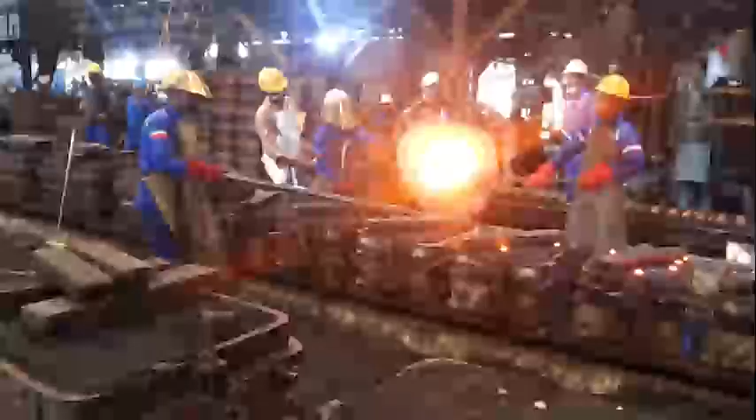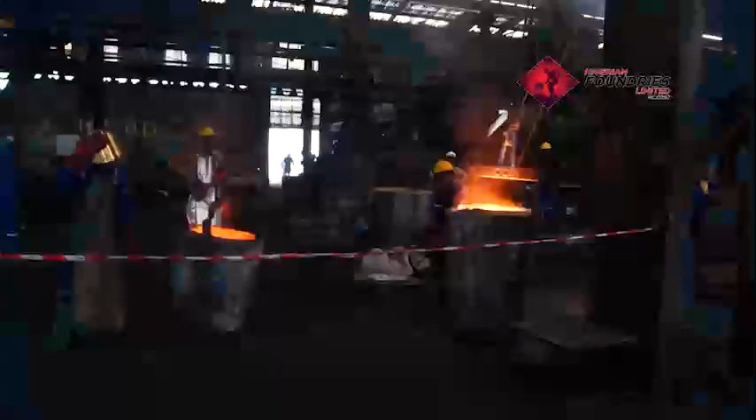There is no mentioning the growth and development of foundries in Nigeria without the name Papadopoulos, the industrious Greek brothers who came to Nigeria in the 50s to drive ease and possibility in Nigerian manufacturing, with the conviction that any country that desires growth needs foundries to support its manufacturing activities. A small grey iron foundry, the Nigerian Foundries Limited, was founded in 1969 by two brothers, Romeo and John Papadopoulos, at Ilupeju, Lagos. After the founding Papadopoulos brothers passed on, over 4 decades later, their sons, Vasily and Nicholas, took over. Vasily Oye Papadopoulos is the managing director of Nigerian Foundries Limited.

Born and raised in Lagos in 1962, Vasily is well-read, vast beyond his operating field, and has acquired advanced general management knowledge across different disciplines. He holds a bachelor's degree in economics and history from Rollins College, Florida, and a master in management degree in international management from Thunderbird School of Global Management at Arizona State University, both in the United States. He is a strong believer and driver of local content as the chairman of the Manufacturers Association of Nigeria Local Content Group. He believes manufacturing can still play a much bigger role in boosting Nigeria's slow-paced economy if and when friendlier policies are implemented to drive the possibility.

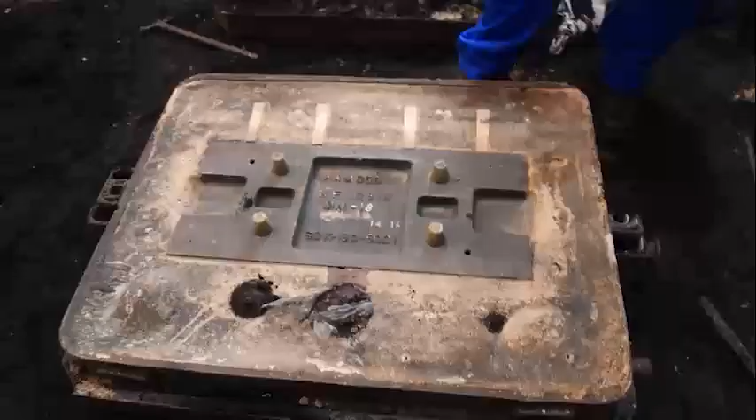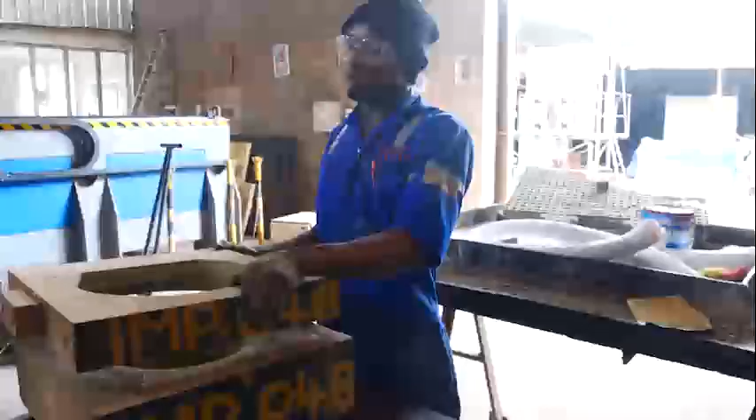Nigerian Foundries Limited has since expanded its operations beyond cast iron, municipal castings, and water pipeline fittings into providing innovative solutions through its fabrication yard and additive manufacturing facilities, among others, across a diverse range of clients within and outside Nigeria, such as clay brick and glass manufacturing, oil and gas, military defense, construction, agro-allied, food processing, to name a few, and it keeps growing.

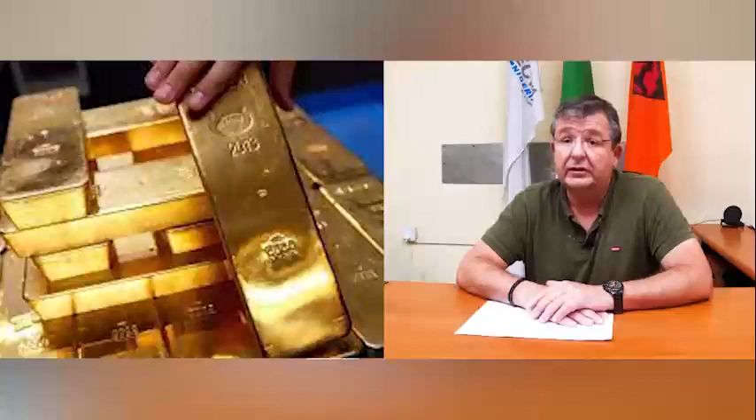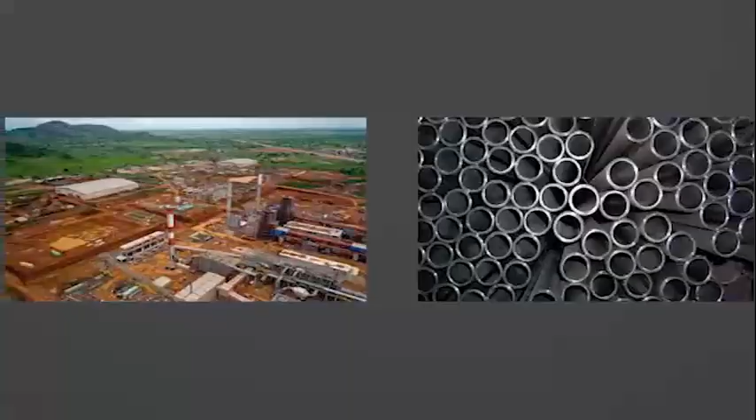Today we can talk that we do have the first Segilola gold mine in Ilesha, the first indigenous official gold mine in Nigeria. We can talk also of African Industries, which has invested considerable money in an iron ore mine on the border of Abuja to Kaduna, where they're actually mining iron ore and using beneficiation methods to make sponge iron to use in their steel mills, very laudable.

We can talk also about mines like Royal Salt in Abakaliki, who've existed probably within the last decade, that are mining zinc and lead. And then we can also talk about a few companies that have sprung up. One of the older ones is Royal Ceramics, that uses indigenous clay to make ceramic products. And I just heard there's another one that just opened up in Ogun State, a huge one. I have not been there, on the way to Ibese Dangote cement plant.

Therefore, I can see that the beginning has started. Results have started coming out of the work that has been done the last decade, or the changes in our mining attitude. So therefore, I can say that we're at the beginning. I don't want to refer to mining done during the colonial era, because that's the past tense.

Well, I don't know where these figures have come from, but definitely oil, hydrocarbons displaced a lot of the solid mineral mining that existed in Nigeria from the colonial times. I would say there have been a lot of unofficial mines, or artisanal mines as they are called today, and there are many of them. There has been a lot of artisanal mining, and the end product gets sent to China. Chinese have been here speculating and buying the products.

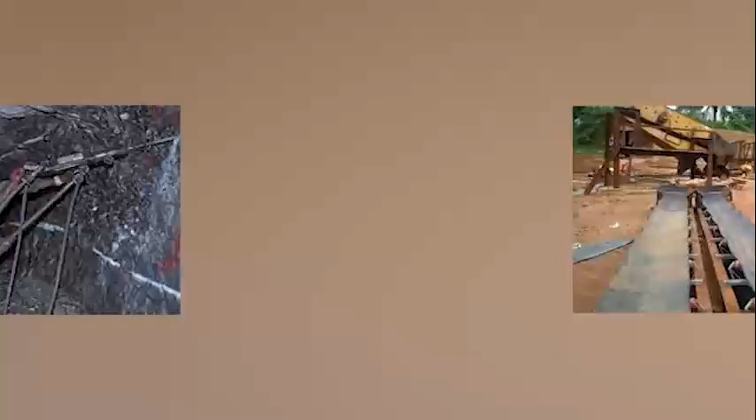So I can't say much more, because in the 80s, I don't remember that many mines, unless we're referring to some of the old mines, like the Onyeama mine in Enugu State, and some of those old government mines which were in the throes of closing down. So I would again want to reiterate that it is only in the last decade that we can say Nigeria has entered the solid mineral game in Africa.

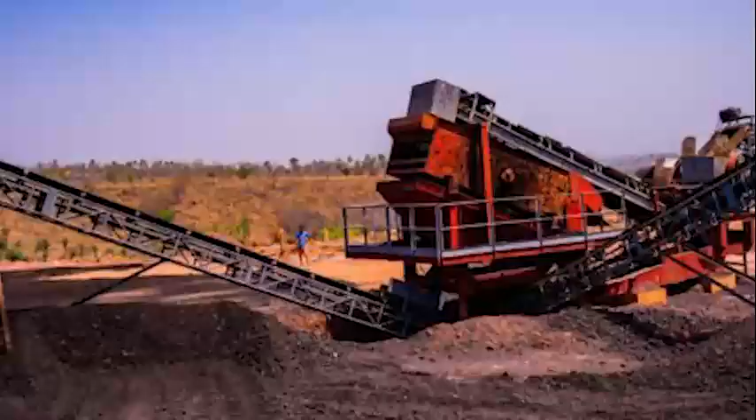Well, illegal mining, which is referred to as artisanal mining, has existed and still exists all over Africa. The Ghanaians are also still battling illegal mining and so on. So the concept is to actually make it favorable and bring them into the fold and make them legal, and not hunt them down to try and force them. That has played a big role again. There's a lot for us to learn from the other African countries, where solid minerals is their forte, as opposed to us. But I think that's the best approach.

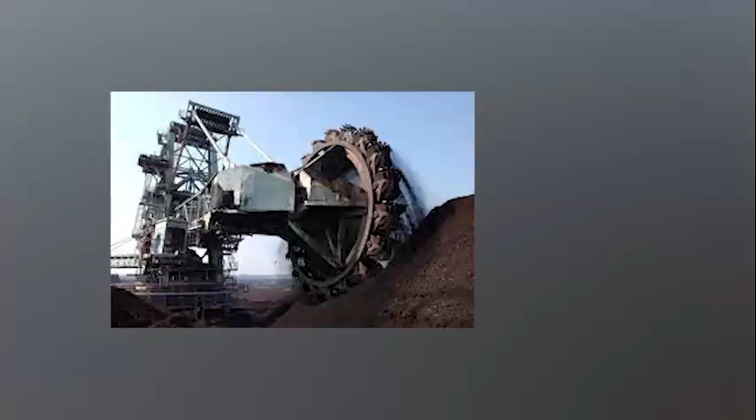Now, of course, there is an issue, because once you start becoming a legal mine, you have to conform to certain statutory factors, and you need to have HSE, health and safety and environment protection. You need to concern yourself about the environment and so on. And most of the illegal mines, or all of them, don't have these costs because they're not concerned. They're illegal. So as a result, they're able to extract minerals much cheaper at the cost to the environment and to the people, and then export it.

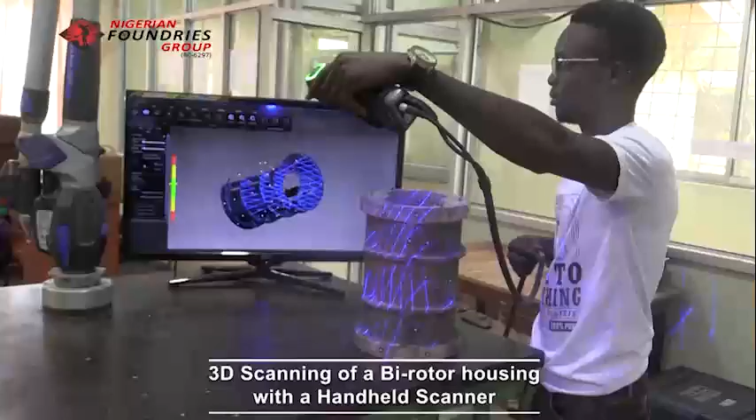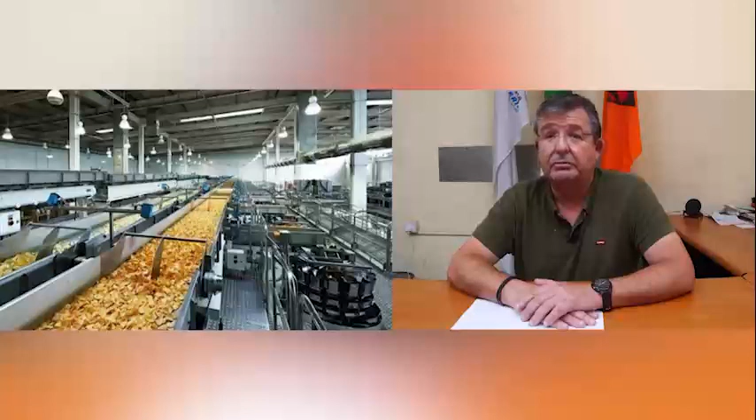We basically have transitioned from being foundries to being reverse engineers. And basically what we do is we keep African industries moving by making tailor-made parts and offering innovative solutions so that industries will not close down. And that's where our forte is today. So mining is one of the areas. Oil and gas is one of the areas. We've even moved into making parts for agro-processing, for food processing plants, and you name it.

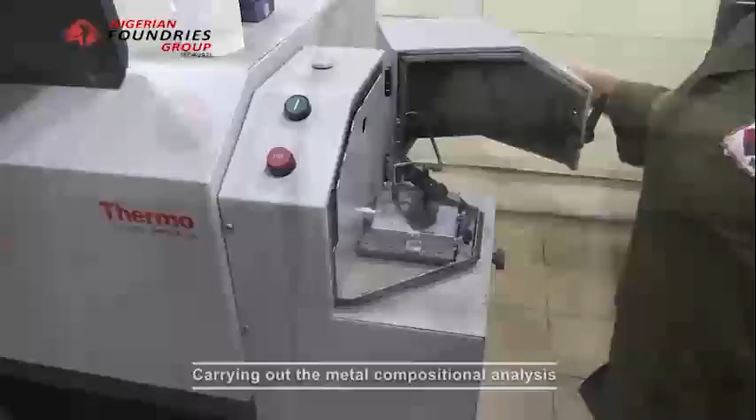What we do is we've invested in additional technologies to be able to produce more and more tailor-made parts. And in particular today, where there is a huge problem of foreign exchange, and we have the disruption of logistics internationally due to COVID and due to the Russian-Ukrainian war, we are seeing more and more companies actually coming to us with their problems to find a solution.

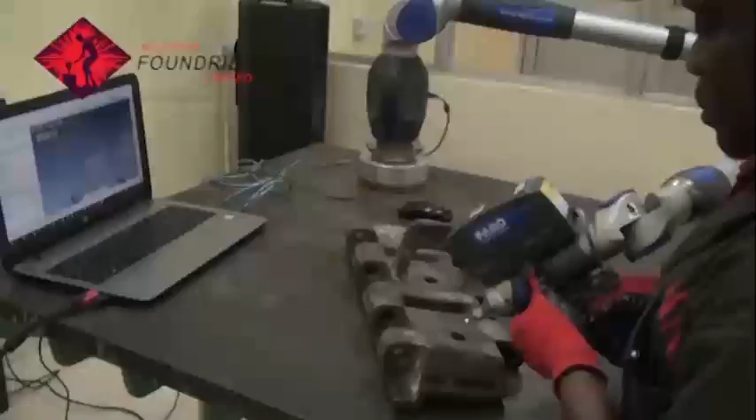So we have employed the latest technologies, which include 3D laser scanning, where we actually scan the parts, develop drawings, and then decide on how we are going to manufacture the parts and give the client the best possibility. Over the years, if you take into consideration that all over the world we just basically have 5 broad manufacturing technologies, we have here 4 of them.

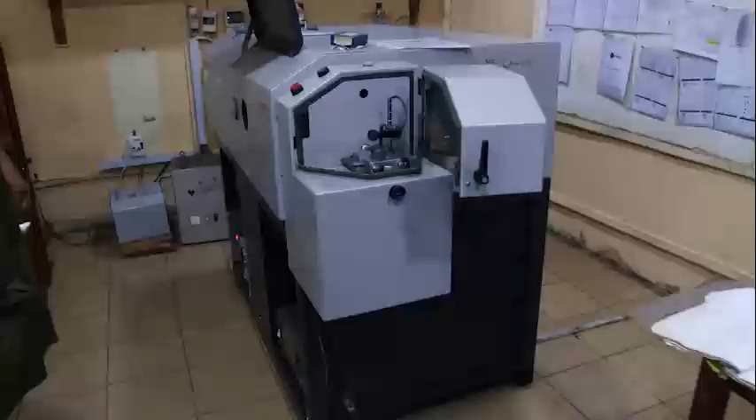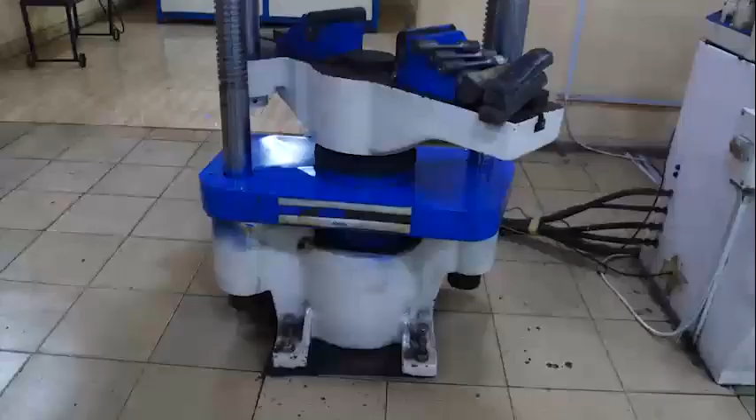We have the foundries, which is both ferrous and non-ferrous. We have 3D printing. We have machining, which is subtractive. We have fabrication. The only thing we don't have is forming, or what we would call in steel, forging. So therefore, a lot of parts can be manufactured using one of the 4 technologies that we possess. Of course, we can't make everything.

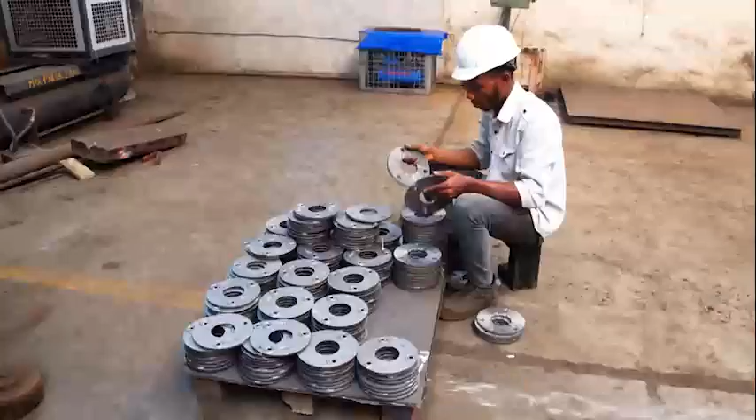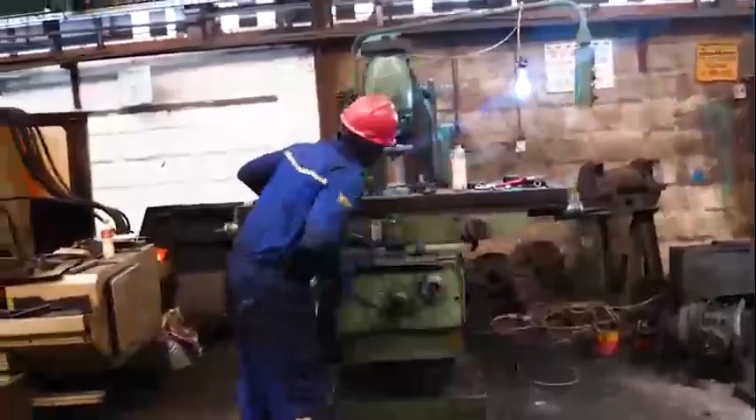Well, either you're asking me the figure to improve or to reach the level that we said we wanted to reach. I don't think we will reach there. We have elections right now, and a new government to come in will take about another 1 year. So there's a lot of hurdles. Only once things stabilize will businesses abroad come and sit and say, yes, let us look at Nigeria to invest in.

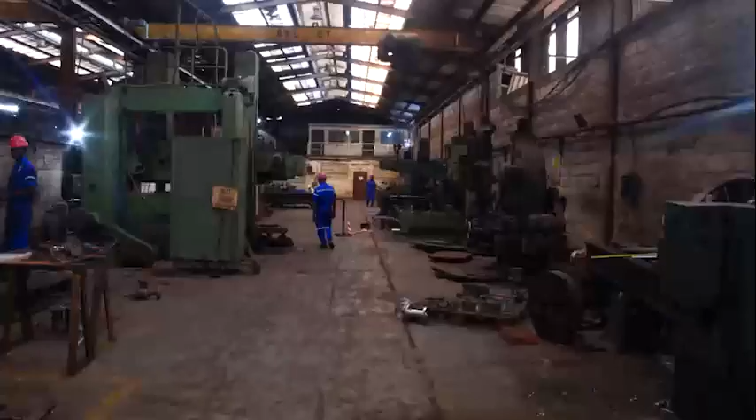I wish to state also one other aspect about us in Africa, is that mining is one aspect. Mineral processing is a broad area which we need to investigate. Making cement is mineral processing. Making tiles is mineral processing. We do not want our mineral resources to be exported in raw form and come back in end products. So there's a huge area over there where companies can invest.

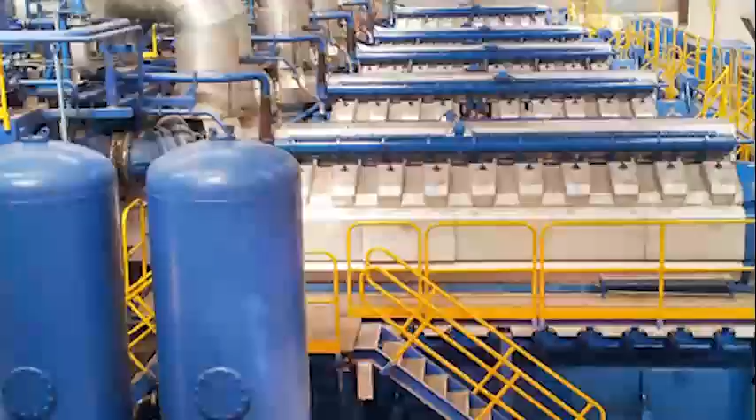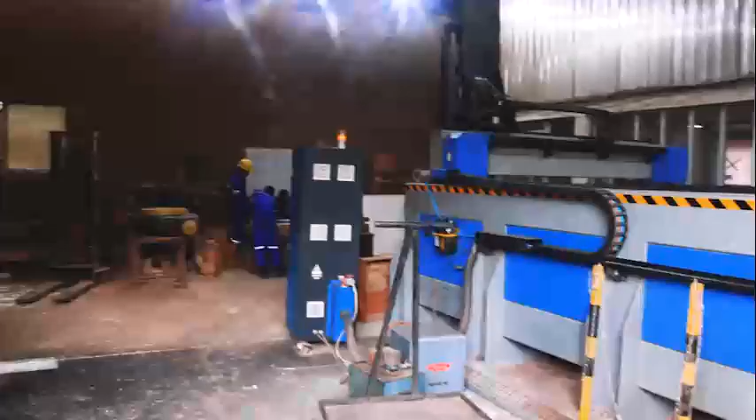A good example is African Industries taking iron ore, making it into sponge iron, using it in their own steel mills to make steel rods and iron building materials. That is a perfect business model. We use CNC machine and 3D printer to make patterns. This section is clearly for manual making of patterns.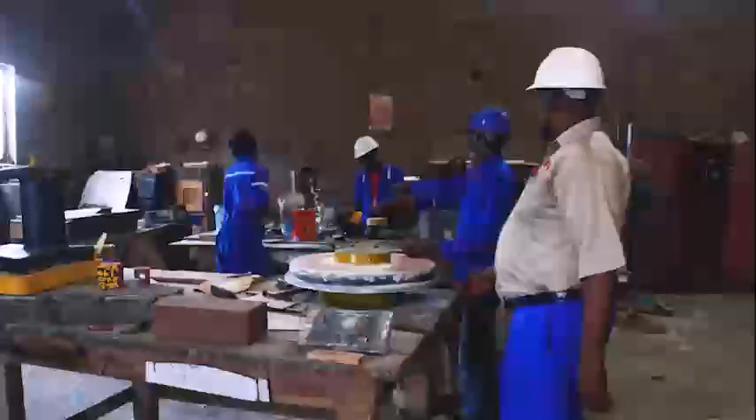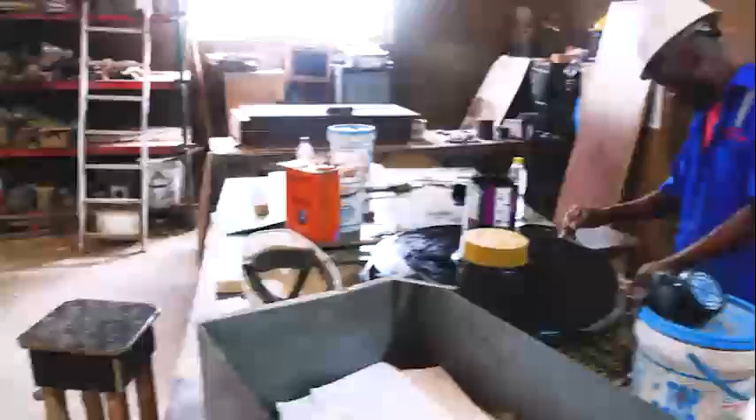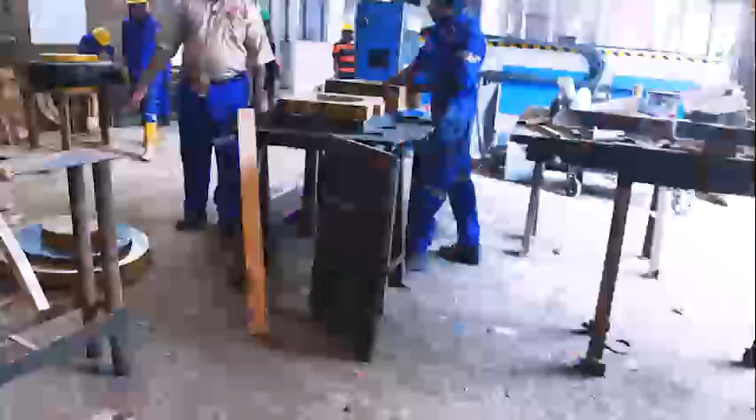This is the front plate for the slurry pump impeller housing, being prepared for molding tomorrow for the gold mine at Osun State. So this is the drawing that they are following to be able to produce accurately. It's part of the pattern of the impeller. This is the core box for the impeller, being prepared for molding tomorrow.

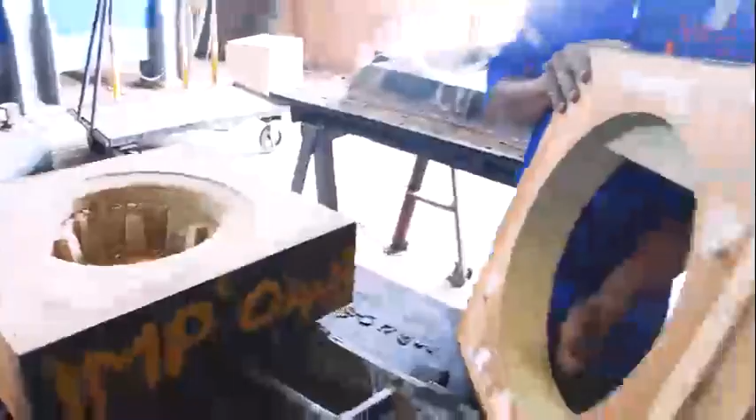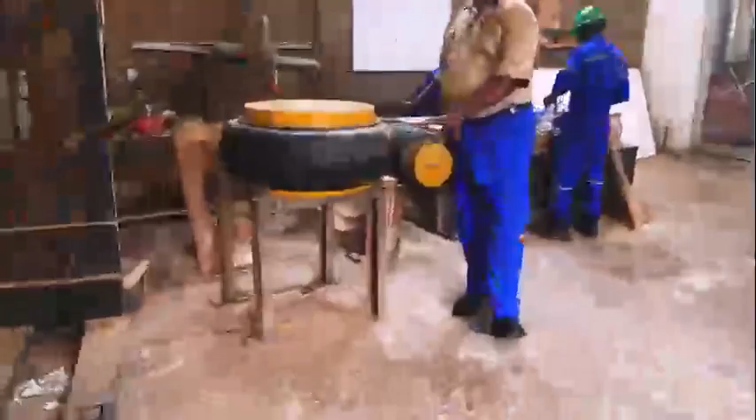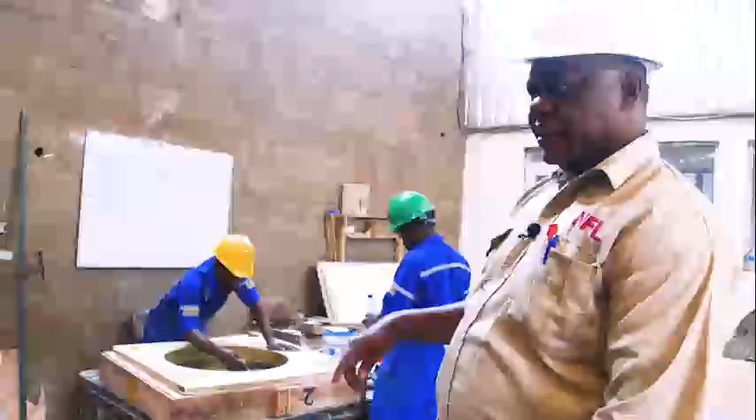This is the impeller housing for the slurry pump. When the gold has been mixed with water, with sand, with all these things, it is pumped out so that it can dry and then the gold can be smelted out. This is part of the core box. They've all been prepared. After supplying the first set, the customer is happy. That's why he's ordering another 3 sets.

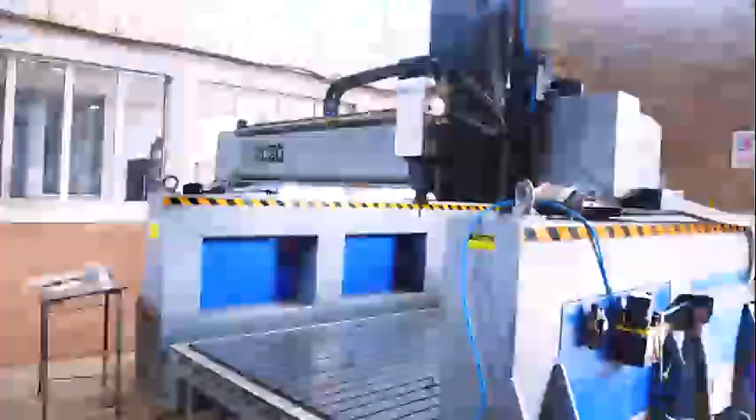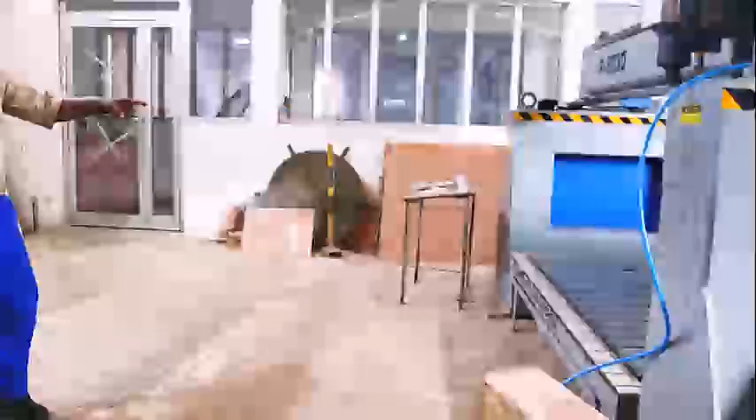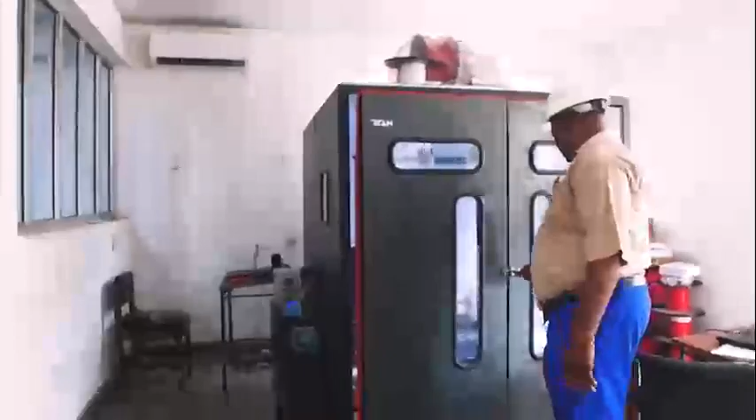This CNC router can do exactly what we are using our hands to do now. This pattern was produced here. I mentioned that we have 3 types of machines here. We have the manual one, where we use the circular saw and planer to make patterns. Then we have the complete CNC router that can make patterns without any human interference. Then we have the 3D printer. This also can make patterns and core boxes. At the moment, it's printing out the core box.

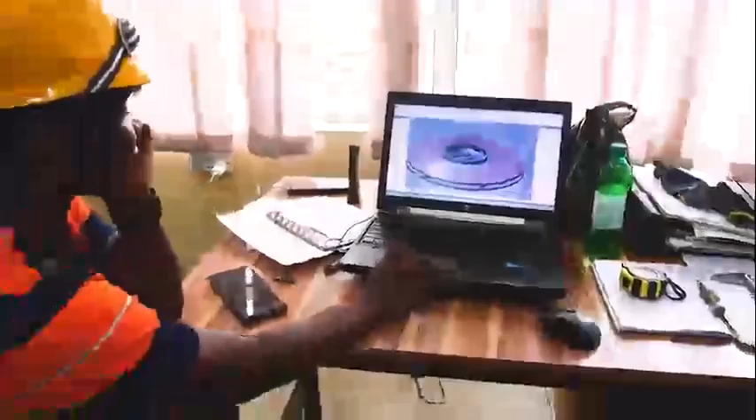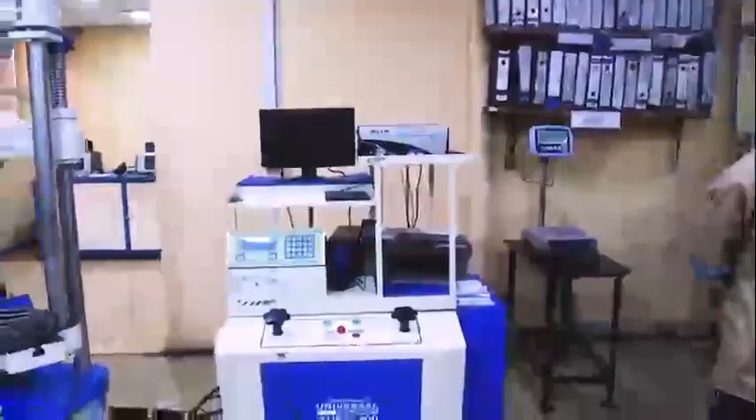This is a typical scanning process. Starting from the silica sand, steel scrap, ferroalloys, whatever other input that we use in making the castings. We have optic spectrometers, both for ferrous and non-ferrous.

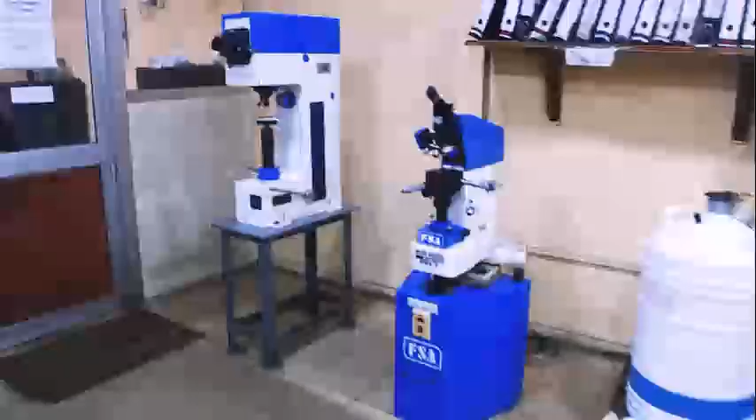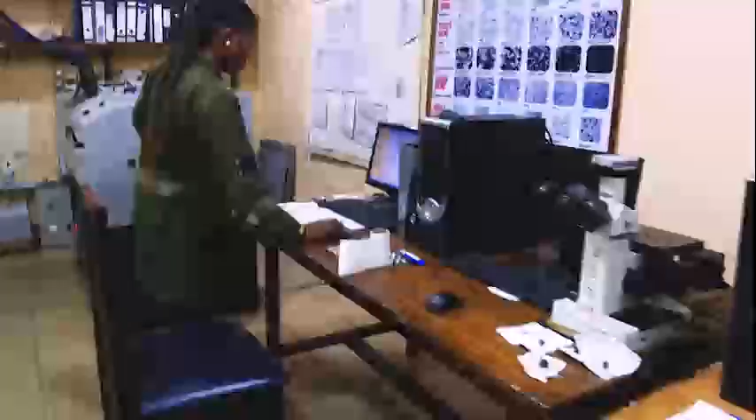We have also metallurgical microscope for checking the microstructures of whatever we have done to be sure that they meet up with the mechanical properties of what the customer demands. These are micro hardness testers for checking the weldment or wires that we have. This is where we check the microstructures, whatever we have produced.

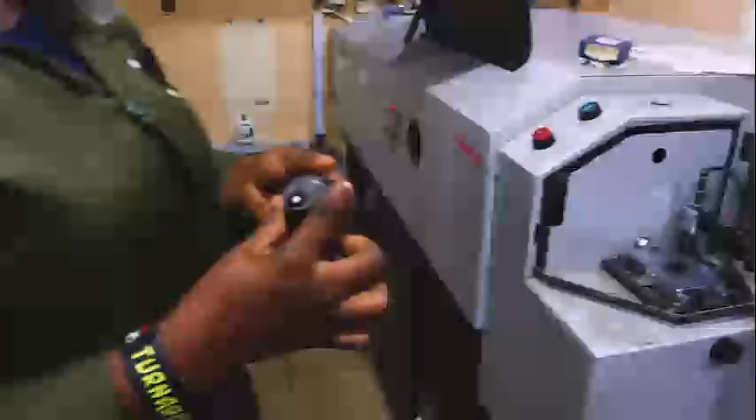We mount sample. This is a typical sample from the melting section. We grind it, mount it on the machine, we'll spark and it will display whatever is the chemical composition of the melt. If it's not correct, we call the furnace operators, they will correct it then before we pour.

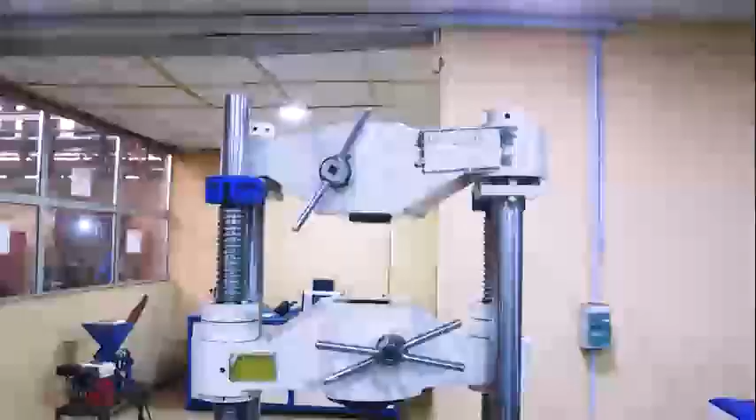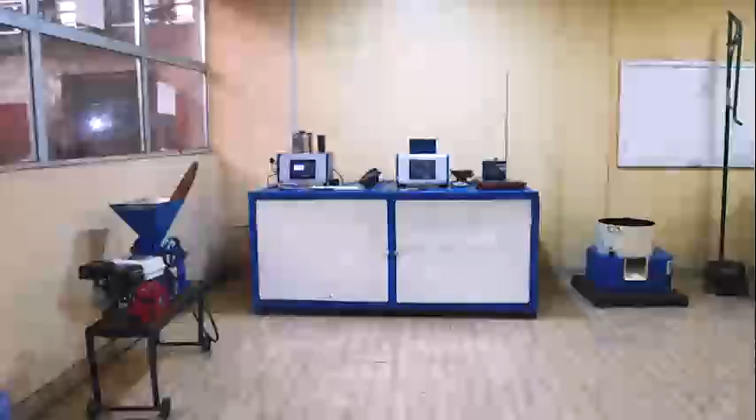Tensile strength, to know whether the strength is what the customer demands, is computerized, so you cannot manipulate the result. This is for sand testing, all the silica sand that comes in, the binders, they're all tested here.

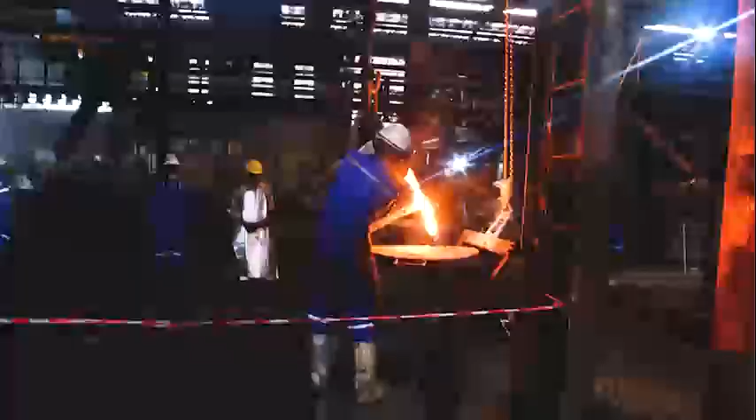This is how the process starts. Inside that ladle, we have some kilograms of ferrosilicon magnesium. You see the reaction. Once they finish pouring, start seeing the reaction, how the metal is reacting with the ferrosilicon magnesium.

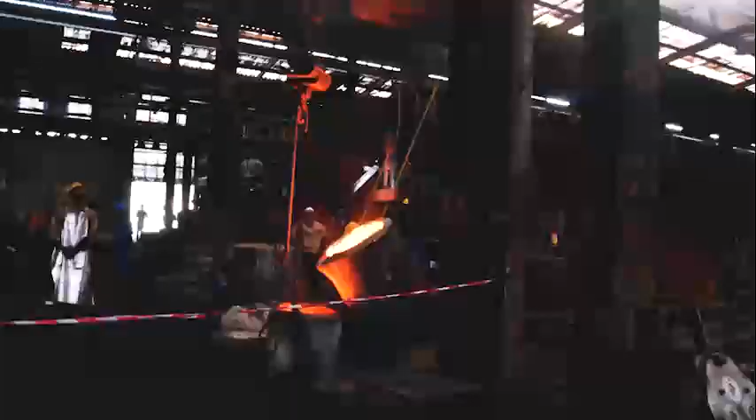Process continue. After the reaction, the metal is transferred from the treatment ladle into the regular ladle so that it can be poured into the mold. Further treatment continue. What we're adding now is called inoculant.

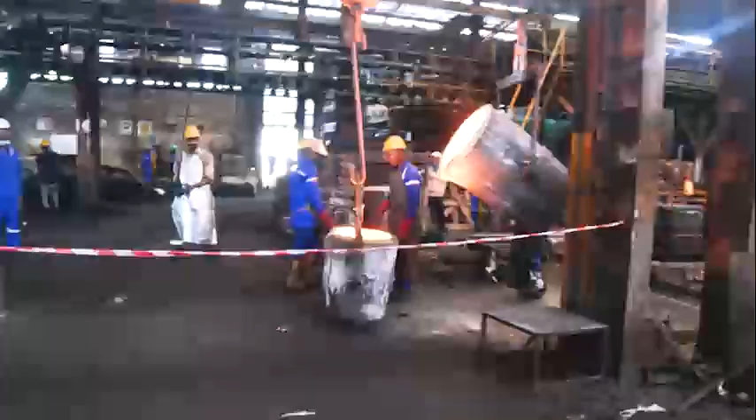Alarm has been set. They must finish pouring this metal within 7 minutes. After 7 minutes, whatever metal remains is poured out as pig.

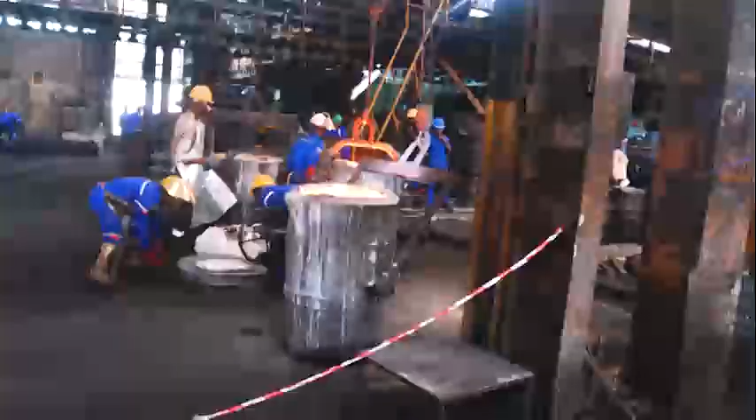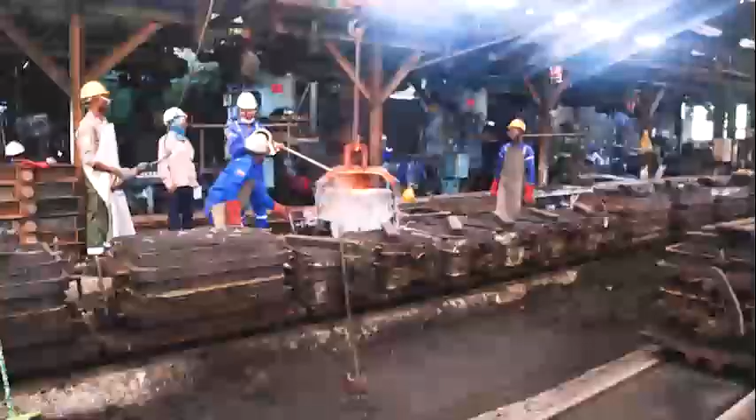Temperature is being checked to make sure that the metal is not too hot, which may result in defect in the casting. Mold treatment is being done on the metal. That metal flowing at a temperature 1,360 degrees.

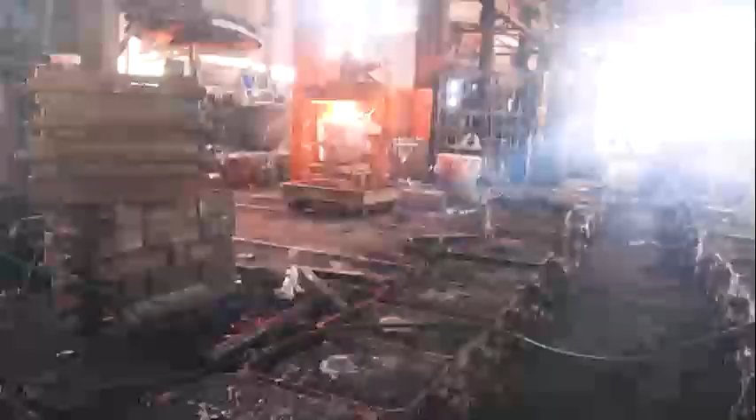What is happening there, we are preheating the ladle. You have to preheat the ladle to 700 degrees before you now receive the liquid metal to avoid explosion when the metal is being poured into the ladle. When the metal is coming at 1400 degrees, the ladle is heated up at least to 700 degrees.

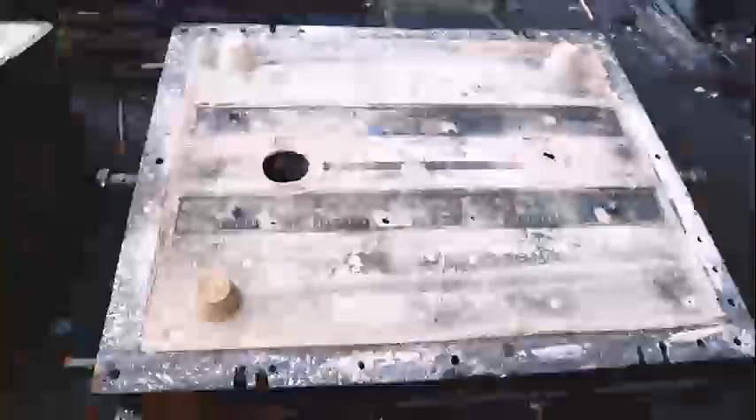Before pouring again, we have to preheat the mold a little so that you have around 200 to 300 degrees. So that when the liquid metal comes in at 1400, there will be no much reaction with the cold mold. Silica sand, which has enough refractory properties.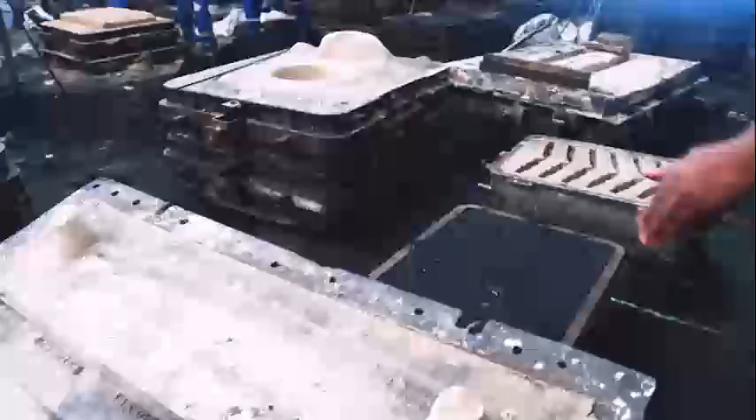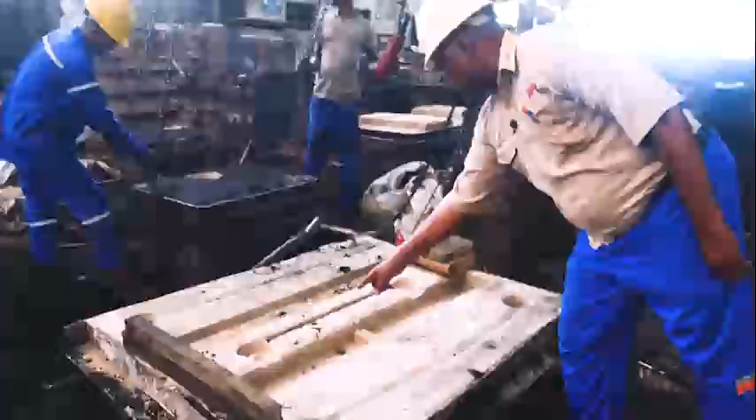This part of the mold is called cope. It will be coated with refractory paint, the cope and the drag. This is the drag part of the mold. After coating, the cope will be covered on the drag. All these cavities is where the metal will flow in to form the casting that we are molding.

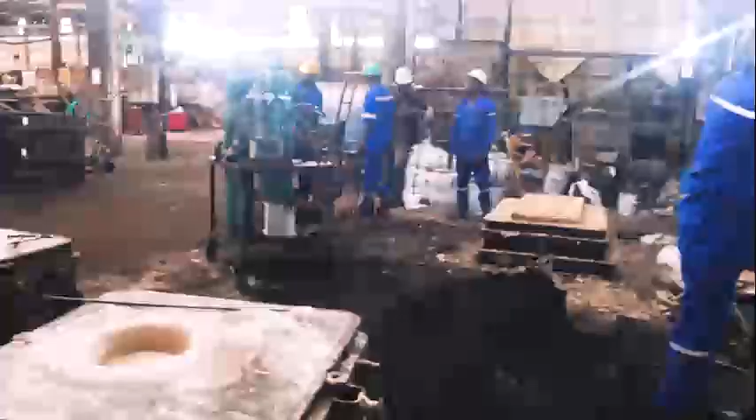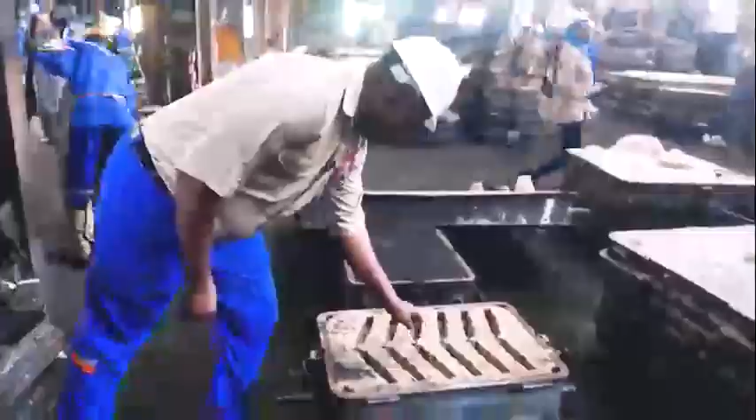This mold here is for the excavator bucket teeth. A core will be placed here in these cavities to form holes that will be attached to the main bucket. So that during excavation, this is the part that wears out and it will be replaced like a consumable. This mold is for hammer.